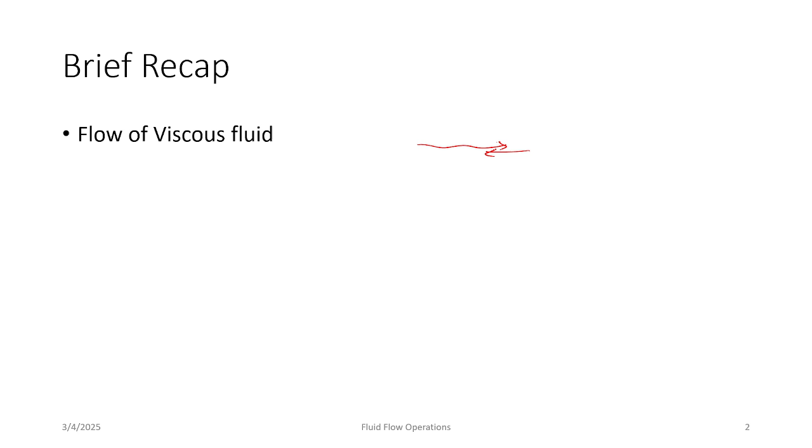When there is viscosity, it acts as an opposite force to the flow. Whenever a fluid is flowing, the viscosity will always act in the opposite direction, trying to stop the fluid. So for the fluid to flow continuously, there has to be a continuous supply of energy required to overcome this shearing resistance.

Because of this, let's say you're supplying E amount of energy, there will always be a certain amount of energy lost, let's call it small e. So let's find out what are the different losses that exist in a pipe.

Fluid frictional resistance: fluid resists objects due to friction acting on the body moving through the fluid. There will always be friction between the surface of any body or pipe and the fluid that is flowing.

Fluid friction also takes place between layers within the fluid that move relative to each other. This internal resistance to flow is also named viscosity. Apart from the viscosity between the liquid layer and the surface of the body, there is also an internal viscosity, because we have different layers of liquid, and between these layers there will be frictional force. Since this happens within the liquid itself, it is called viscosity.

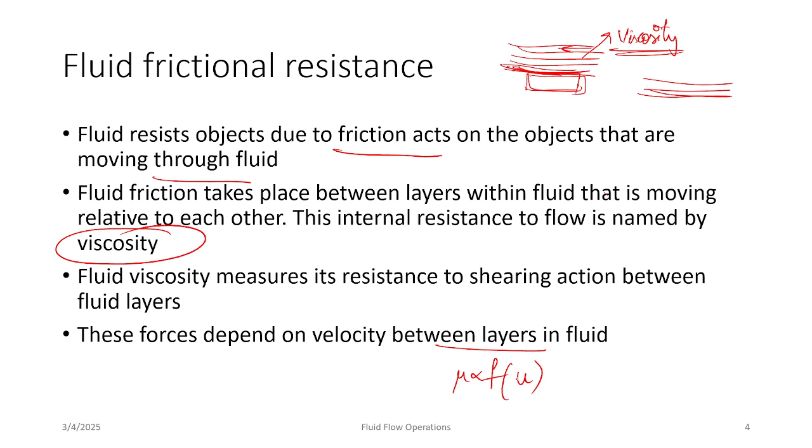This internal resistance is called viscosity. Fluid viscosity measures its resistance to the shearing action between fluid layers - how much resistance is applied between these layers. These forces depend upon the velocity between layers in the fluid; viscosity is dependent upon the velocity between the layers, du by dx, a function of change in velocity with distance.

Frictional losses: during frictional losses through the conduit, energy is lost due to frictional resistance. This is called frictional loss, and as mentioned, this is considered an external resistance. In laminar flow, losses are proportional to the fluid velocity.

Whereas in turbulent flow, losses are proportional to the square of the fluid velocity. The friction losses can be quantified by the loss of pressure or head, as we already discussed about head. This loss can be quantified in terms of loss of pressure or loss of head that occurs in a pipe or duct flow due to the effect of fluid's viscosity near the surface of the pipe.

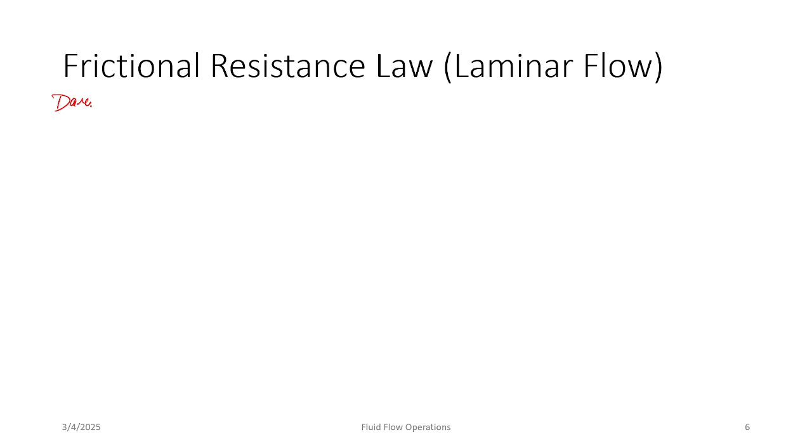Let's discuss the frictional resistance law in laminar flow. This is also called Darcy-Weisbach or Fanning friction. We'll use these equations, Darcy and Fanning equations, to calculate this frictional resistance.

Bernoulli has already given an equation which formulates the relation between changes in total energy of the fluid and energy dissipation. This energy dissipation can be expressed in terms of head loss or specific energy loss. Head loss can be expressed as HF, or it can be given in terms of specific energy loss, that is GHF, in joules per kg.

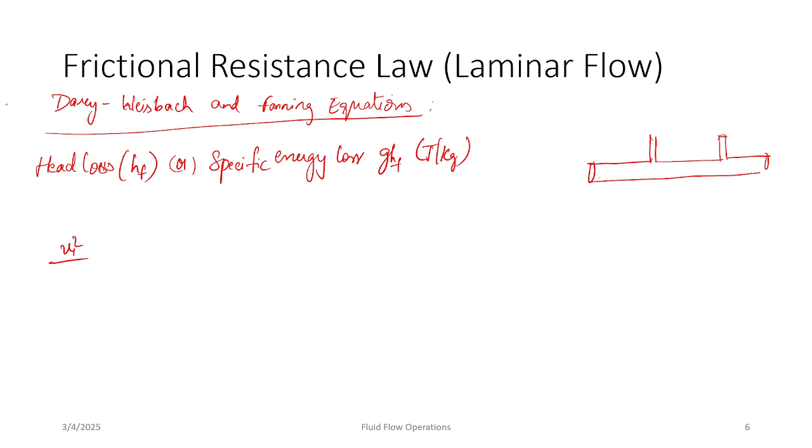According to Bernoulli's principle, we have U1 squared. Let's take a fluid flow in a pipe. Let's say here we are having this is H1 and this is H2, which is a liquid level. And U1 is equal to U is equal to U2, meaning velocities are the same at both these locations, and these are separated by a distance of L. Let me redraw it again.

This is H1 and this is H2, and they are separated by a distance of L. Velocity is the same at both these locations. Let's say the height difference between H1 and H2 is given by HF. If you apply Bernoulli's equation at both these places, we get U1 squared by 2G plus P1 by rho G plus Z1 equals U2 squared by 2G plus P2 by rho G plus Z2 plus HF. So this is H1, the total head, and this is H2, the total head at location 2.

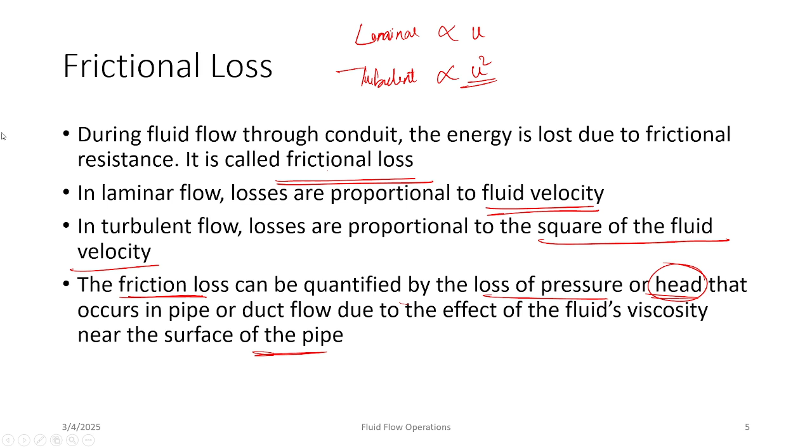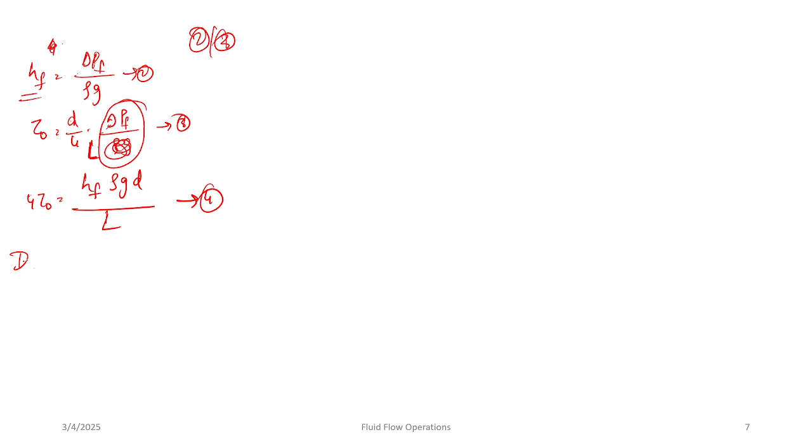Then we'll have 4 tau naught by rho u square by 2. So this is basically velocity. Rho u bar square by 2 is equal to Fd. Okay, we'll come to this later. Fd, and this is equal to hf into rho g d by L into rho u square by 2. Okay, let's say this is equation number 5.

Okay, so this hf is called Darcy, or let me write this equation again. Hf is equal to Fd into L u bar square by 2gd. Okay, so this equation is called Darcy Weisbach equation.

Okay, so we have one more form as well for this equation. This can also be written as del Pf is equal to half into Fd into rho u bar square into L by d. Just substitute Hf is equal to del P by rho g, and you will be getting this equation. So this is equation number 7. This is 6. Okay, this is also Darcy equation.

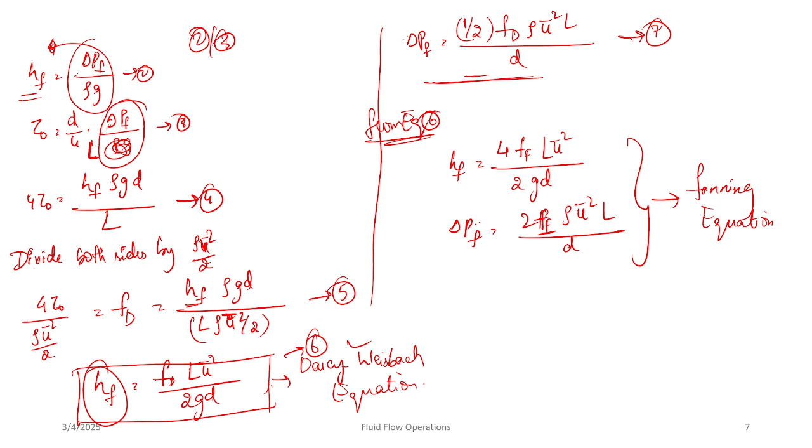Okay, so this equation number 6 can be further expressed as Hf is equal to 4 Ff into L u bar square by 2gd. And similarly del Pf will be equal to 2Ff into rho u bar square into L by d. Okay, so this is called fanning equation, and here Ff denotes fanning friction factor.

So always remember fanning friction factor will be 1/4 of the Darcy friction factor, that is Fd. So this is called Darcy friction factor, and this is fanning friction factor. So Ff will always be equal to 1 by 4 of Fd, which is a function of Reynolds number and epsilon by d.

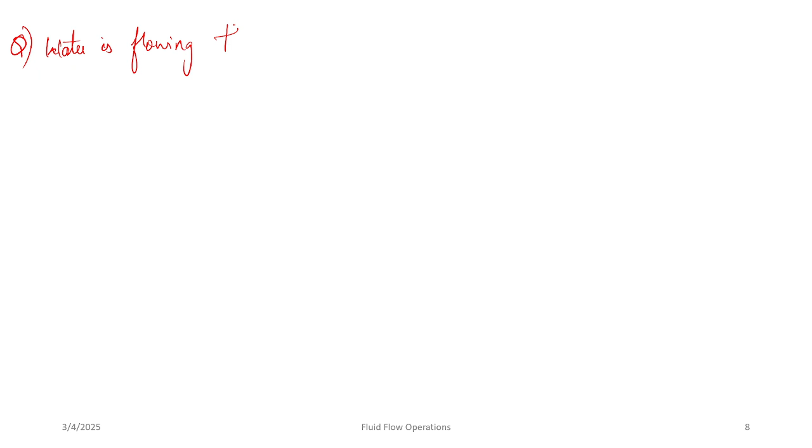Okay, so let's take an example. Let me write down the question. Water is flowing through a 10-meter long circular pipe of diameter 0.05 meters at an average velocity of 2.5 meter per second. So determine the head loss, frictional pressure drop, and shear stress.

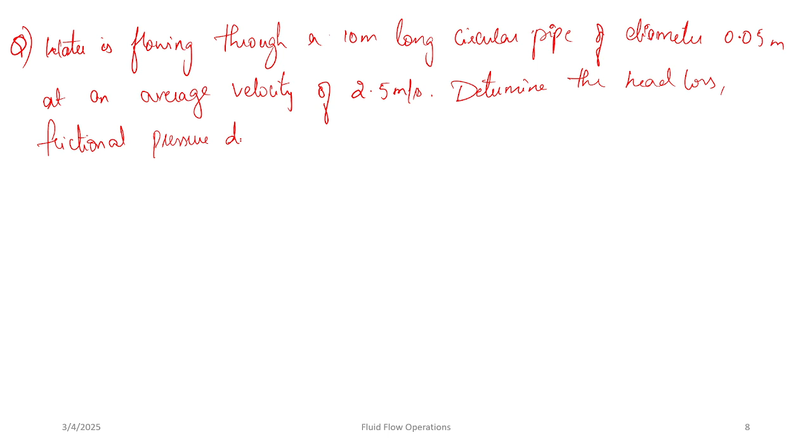So we are already given that Darcy friction factor is 0.115. So how do you calculate this? We are supposed to calculate the head loss. So head loss is given by HF, which is equal to FD into L U bar square by 2GD. Okay, so we are already given all the values.

We were given average velocity, that is 2.5. U is given, and the length L is also given. So L is equal to 10 meters, U is equal to 2.5 meter per second, and diameter is also given, that is 0.05 meters. So FD is also given, that is 0.115. So FD is given, L is given, U is given, 2 is constant, D is given, and G can be taken as 9.8 meter per square second, or you can also take 10 if that suits the calculation, depending upon your calculation simplicity.

So if you solve this correctly, you should be getting around 7.36 meters. And we are also asked to calculate frictional pressure drop, right? So how do you calculate it? Just substitute the value for HF.

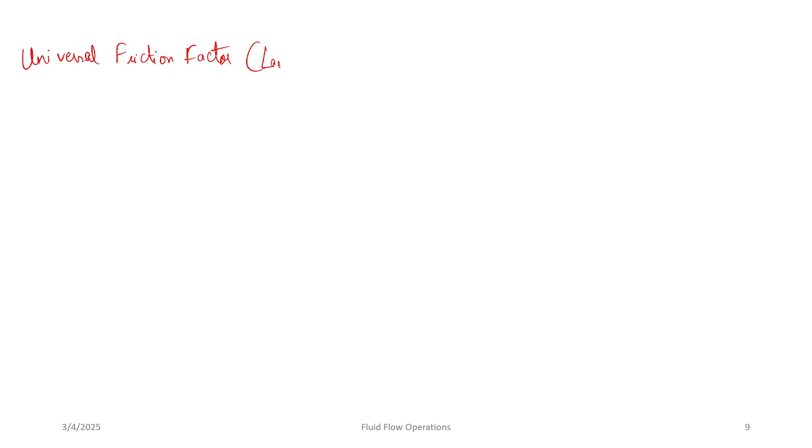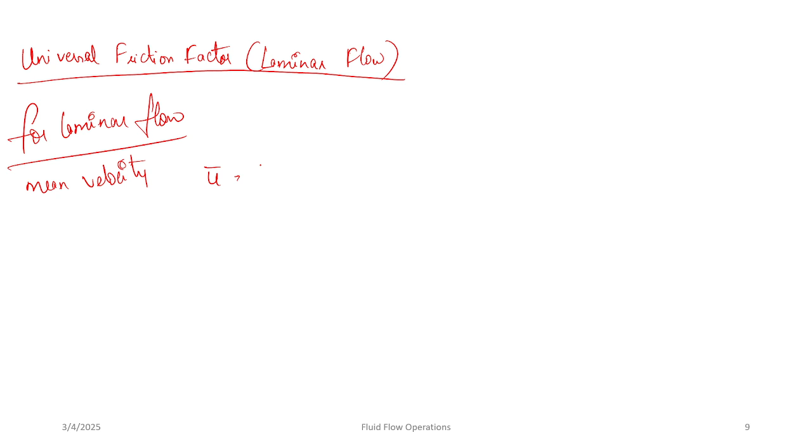So we know for laminar flow, mean velocity can be calculated as discussed long back. Mean velocity can be written as R naught square by 8 mu into dp by dx. This can also be written as d square by 32 mu into del p by L. Let's say this is equation 11.

So from equations, let's say this is 7, this is 8, and this is 9, and this becomes equation number 10. So from equation 9 and 11, we can write Fanning friction factor FF as 16 by rho u bar d by mu.

This will become 16 by RE. So we have F. We can also write it in terms of FD. FD will be equal to 4 times FF, so it will be 64 by rho u bar d by mu, which will be equal to 64 by RE.

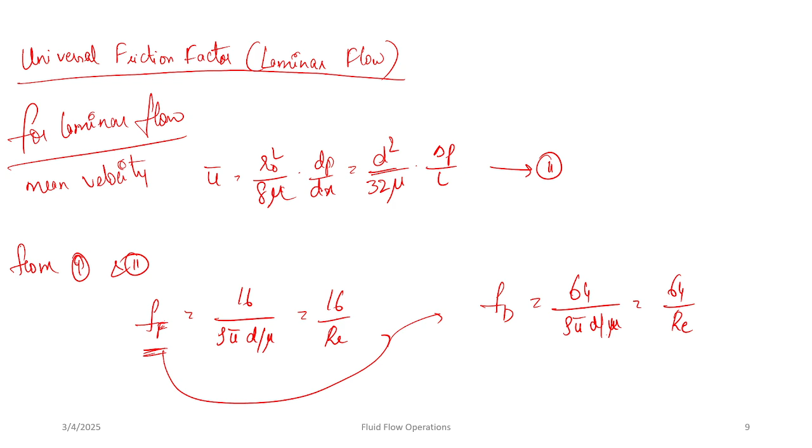And for turbulent flow, as per equation number 5, FD will be equal to 4 tau naught by rho u bar square by 2. Let's say this is equation number 14.

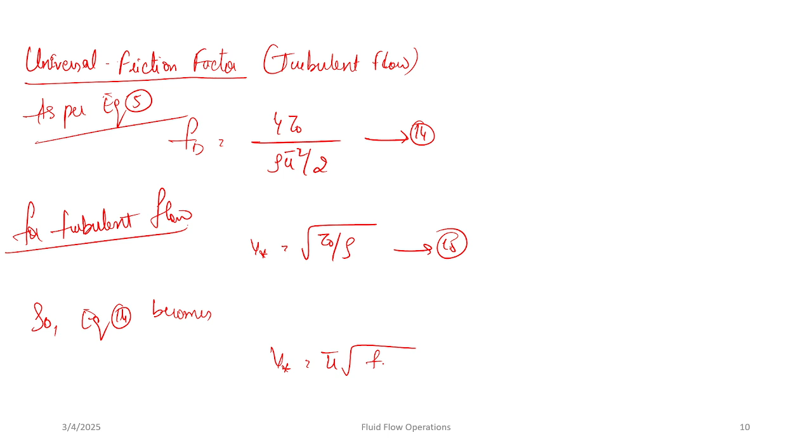And for turbulent flow, V star will be square root of tau naught by rho. Let's say this is equation 15. So equation 14 can be written as V star is equal to u bar into square root of FD by 8. Let's say this is equation 16.

This is equation number 16. So let's see the case for turbulent flow through smooth pipe.

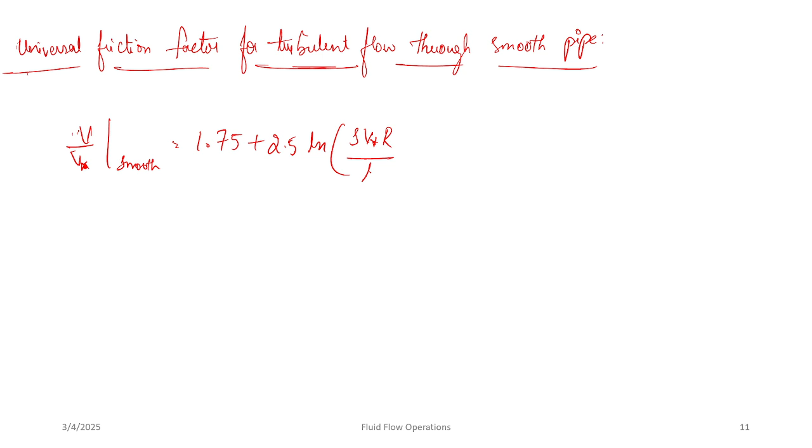For turbulent flow through smooth round pipe, the average velocity can be given by, since it's turbulent flow, we'll be dealing with V star. V by V star smooth will be equal to 1.75 plus 2.5 into ln of rho V star R by mu. This also we discussed last time. Let's say this is equation number 17.

So if you substitute shear velocity V star from equation 16 into equation 17, we get 1 by square root of FD by 8 is equal to 1.75 plus 2.5 into ln of rho u bar by mu into square root of FD by 8 into d by 2. Let's say this is equation 18.

And if we further simplify this, we get 1 by square root of fd is equal to minus 0.913 plus 0.884 into ln of re root fd.

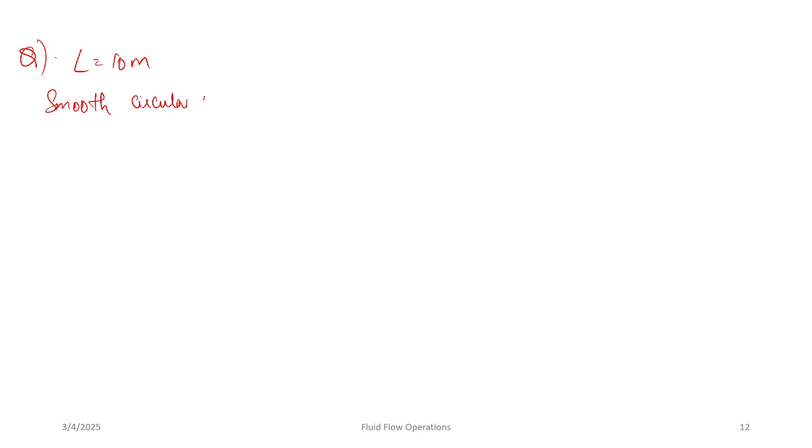Water is flowing through a 10-meter long circular smooth pipe. So L is equal to 10 meters, smooth circular pipe. Diameter is given as 0.05 meter. And the fluid inside this circular pipe is flowing at an average velocity of 3.076 meter per second.

So this is a circular pipe. Its length L is equal to 10 meters. Diameter is equal to 0.05 meters. And velocity or mean velocity or average velocity is given as 3.076 meter per second. We are asked to calculate shear velocity V star and Darcy friction factor FD.

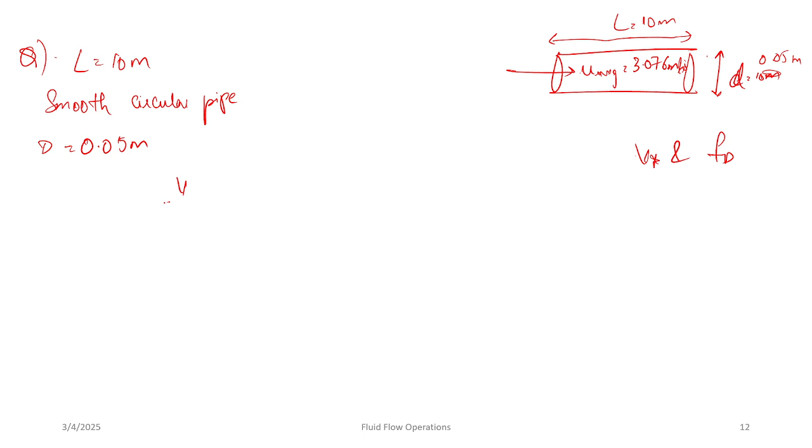So let's use the same equations. V by V star is equal to 1.75 for turbulent flow within a smooth circular pipe. So let's use the same equation: V by V star smooth will be equal to 1.75 plus 2.5 into ln of rho V star R by mu.

V is given, and this is also dependent as V. V is given as 3.076 by V star, which is equal to 1.75 plus 2.5 into ln. Here water is flowing, so rho will be equal to 1000 kg per meter cube, and viscosity will be 0.001 for water. Let's substitute them.

It will be 1000 into V star into radius, that is half of diameter, so it will be 0.025 by 0.001.

So if you simplify this, V star will be around 0.139 meter per second. And we are also asked to calculate Darcy friction factor, right? So how do you calculate it?

Using this equation, we'll get 1 by square root of FD is equal to minus 0.913 plus 0.884 ln of RE square root, RE into square root of FD. So here we have to use trial and error method, because we have to check which would be the correct answer.

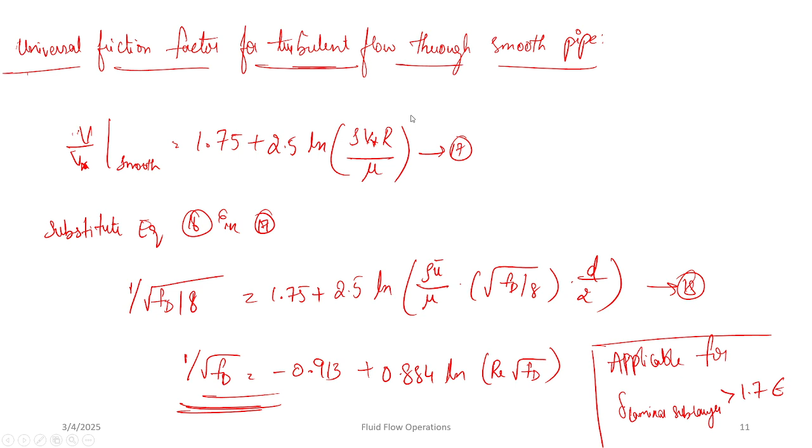If this is clear, we'll move on to the next one. So now we discussed about friction factor in turbulent flow for a smooth pipe, right? So let's see the case for rough pipe.

So firstly, if you are changing the surface of the pipe, that is, if you're changing from a smooth pipe to rough pipe, the relation of the equation for shear velocity will also be changing, right? So let's first write it down.

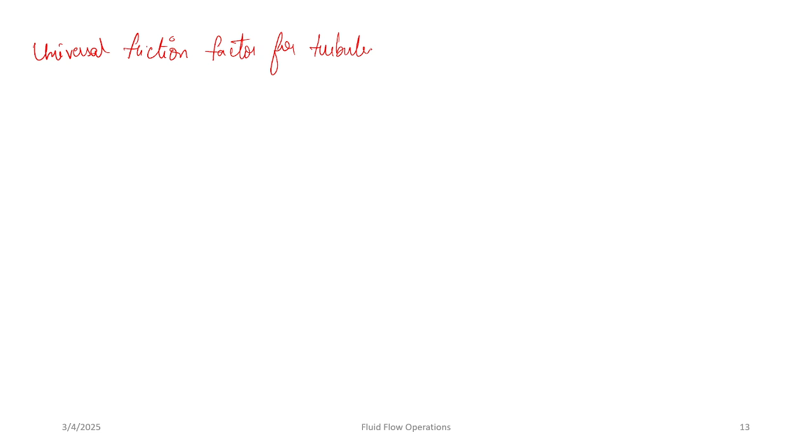Through rough pipe. So for turbulent flow through a rough round pipe, the average velocity will be given by V by V star rough, which will be equal to 4.75 plus 2.5 into ln of R by epsilon. So this is equation 19.

Now substitute V star from equation 16. If you substitute and simplify the equation, you'll be getting 1 by square root of fd by 8 will be equal to 4.75 plus 2.5 into ln R by epsilon. Or let's say you can also write 1 by square root of fd will be equal to 1.066 plus 0.884 ln d by epsilon. So let's say this is equation number 20.

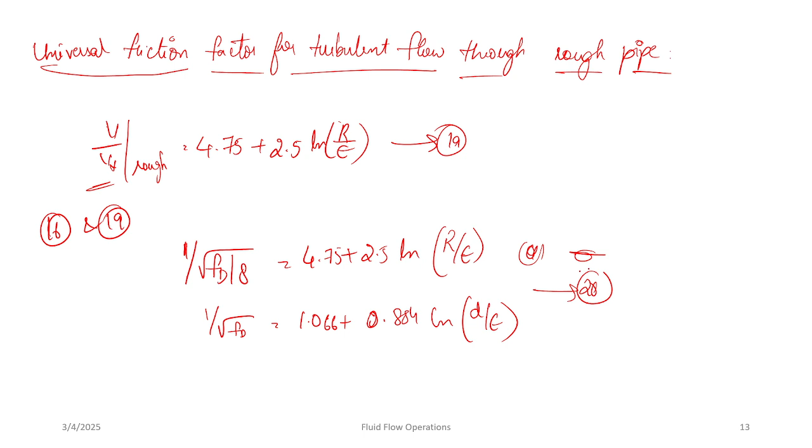And this is applicable for delta less than 0.08 epsilon.

So let's also solve the same problem that we just discussed. Let's say all the conditions remain the same, but instead of a smooth pipe, we are having a rough pipe in this condition. So water is flowing with average velocity 3.076 meter per second through a rough pipe. Length is 10 meters, diameter is 0.05 meters. Now calculate shear velocity and Darcy friction factor.

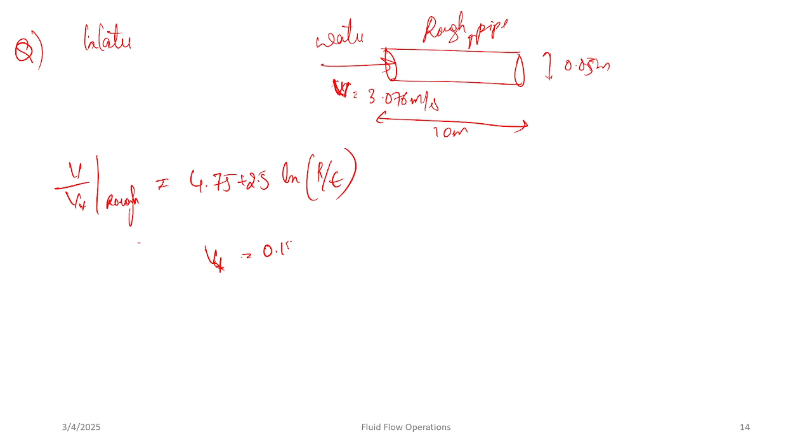So we have V by V star rough is equal to 4.75 plus 2.5 into ln R by epsilon. Using trial and error method, V star will be 0.136 and epsilon will be 0.02 mm. We have to do the trial method because we have two variables here.

Using these values, if you solve for FD, it will be 1.066 plus 0.884 into ln d by epsilon. So if you substitute values, FD will be equal to 0.01561.

So this roughness factor, like we are saying smooth pipe and rough pipe, right? This is a relative term and it depends a lot on the material of the pipe. So let's see the values of this roughness for different pipes.

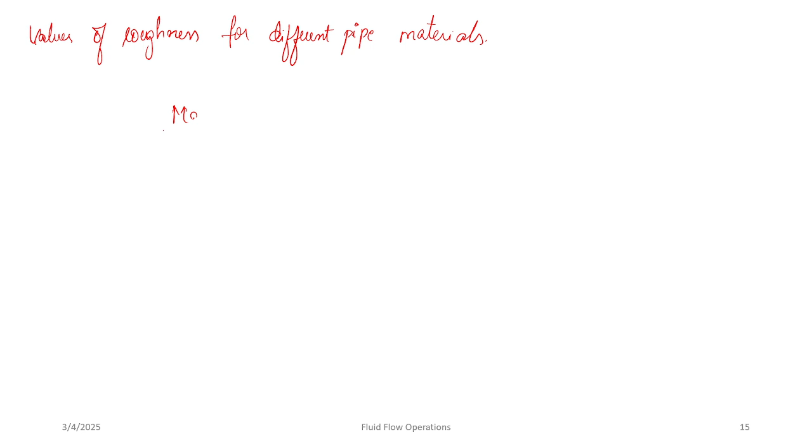So for asphalt cast iron, these are experimentally determined values. So for asphalt cast iron is 1.2 or 1.12 or 0.120, and for cast iron this is 0.265.

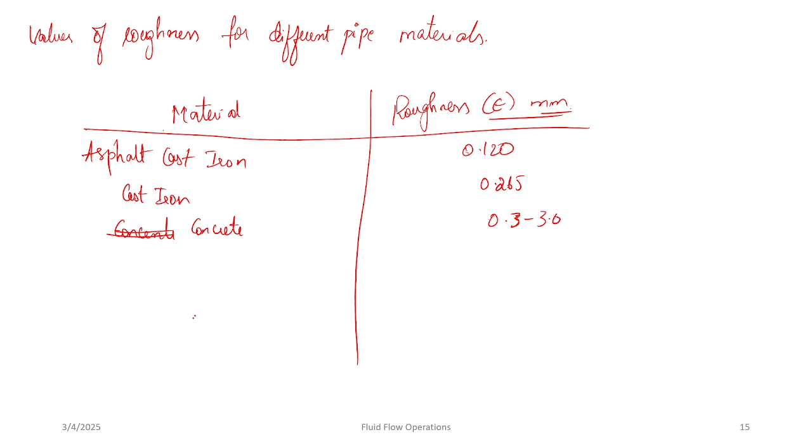For concrete pipes, this is 0.3, and it also varies till 3, so 0.3 to 3. And for galvanized iron, 0.15. For PVC, glass, and other drawn tubing, this value is 0.0015. So it depends on the material of construction.

So let's say you are using a pipeline. Let's take any material, be it cast iron, asphalt cast iron, or concrete pipe, whatever it may be. So you have started using a pipeline.

As you use it for a very long time, what happens? The roughness will not remain the same, right? It will be varying, it will be changing. So when you use it for a long period of time, the roughness of the pipe will be changing. So how do you determine this change in roughness? You have to know the value of the initial roughness, or roughness of the new pipe, then you'll be able to calculate the roughness of the old pipe. So let's see how to do this.

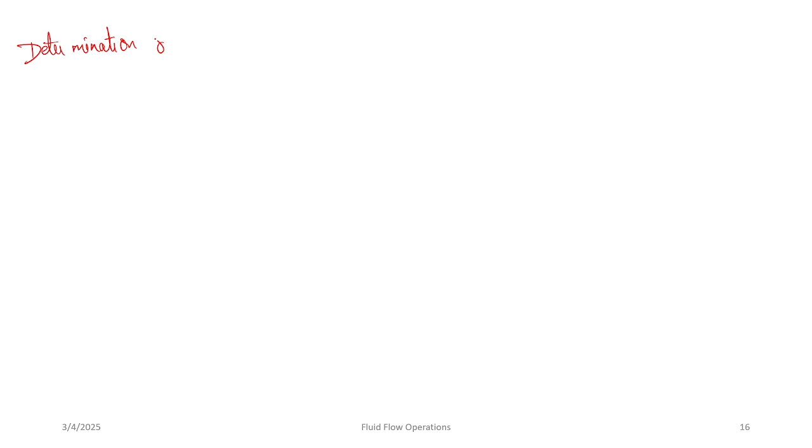Determination of roughness of old pipe. According to Colebrook and White, the roughness height of old pipe can be determined by knowing the roughness height of new pipe based on the age of the pipe. They formulated that E old, the roughness height for an old pipe, will be equal to roughness of new pipe plus alpha T.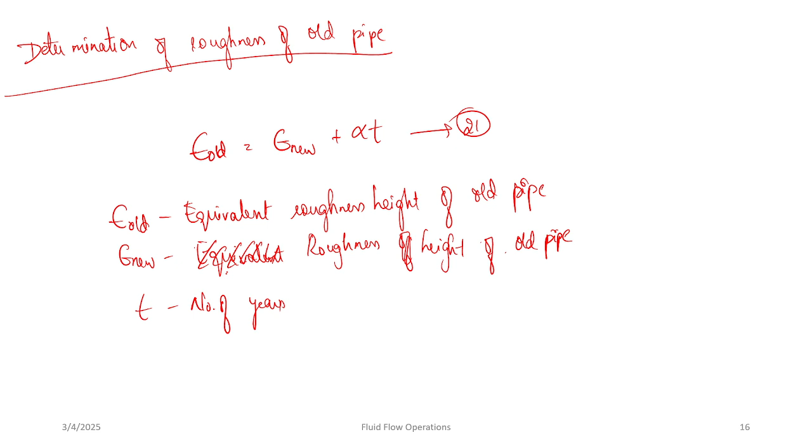Where E old is equivalent roughness height of old pipe, and epsilon new is equivalent roughness height of new pipe, and T is the number of years of usage, and alpha is constant.

This alpha can be determined experimentally, which varies depending upon the pipe, varies with pipe material. So let's take an example.

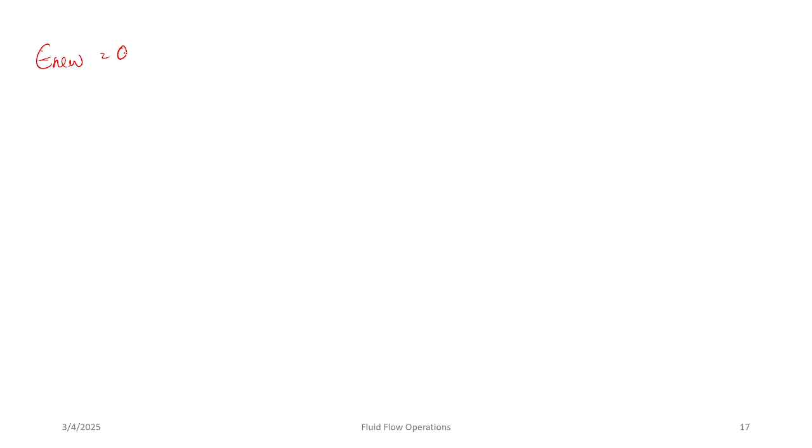It is observed that high viscous corrosive liquid is flowing through a pipe of roughness 0.08 mm. So E new is given as 0.08 mm, and the pipe was kept unused for almost 5 years. So T is 5, and it was found that when it was used, the roughness of the pipe was 0.01 mm, that is E old will be 0.01 mm. So what should be the roughness of same pipe when it is used after 5 years? We are asked to calculate E old after 5 years.

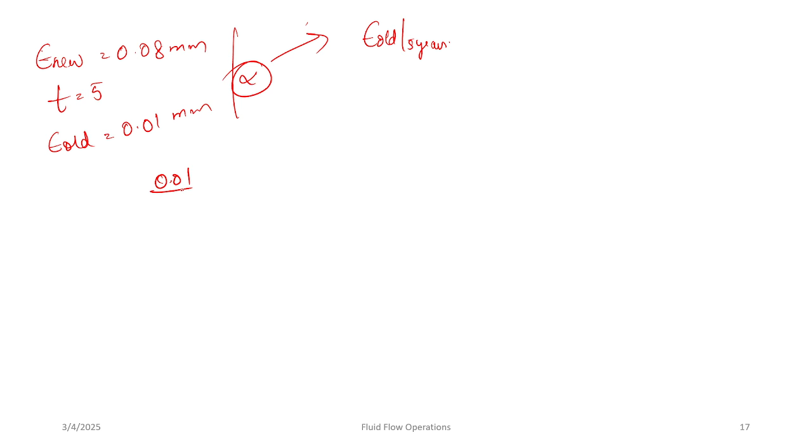So how do you do it? First, we have to calculate alpha from this data. Then we'll be able to calculate E old after 5 years. So this will be 0.01 by 1000, this is in mm, right, will be equal to 0.08 by 1000 plus alpha into 5 years, right, 5 into 365 days into 24 into 3600.

So alpha will be minus 4.439 into 10 power minus 13. So now we can calculate E old.

That will be E new minus alpha T. So this will be 0.08 by 1000 minus of minus 4.439 into 10 power minus 13 into 5 into 365 into 24 into 3600. If you solve this, we'll be getting 0.00015 meters, that is equivalent to 0.15 mm.

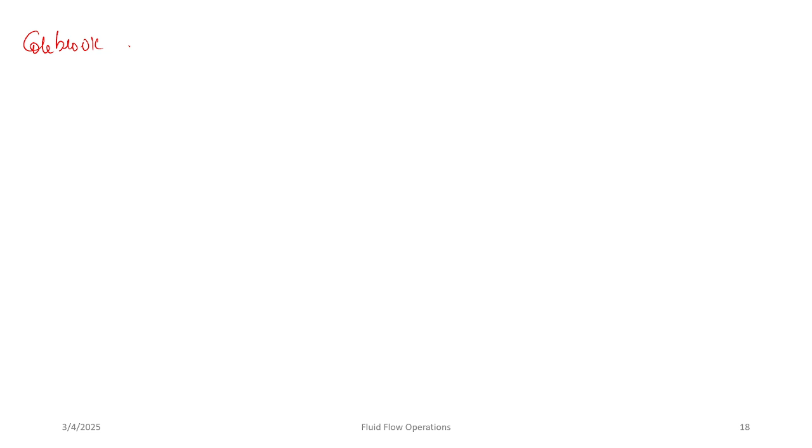So we have an empirical formula given by Colebrook for calculating friction factor - Colebrook empirical equation for friction factor. For different conditions, he recommended certain empirical equations.

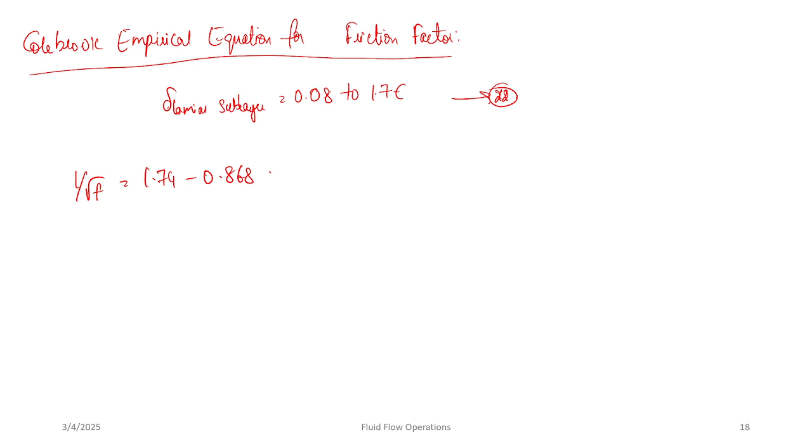Let's find out this equation. For laminar sublayer thickness of 0.08 to 1.7 E, 1 by square root of F will be equal to 1.74 minus 0.868 ln epsilon by R plus 18.7 by RE into square root of F. This is equation number 23.

This can also be written as 1 by square root of F is equal to minus 0.868 ln epsilon by 3.7 D plus 2.51 by RE into square root of F. This is equation number 24. He's also mentioned different conditions, this is for laminar sublayer thickness of 0.08 to 1.7 epsilon.

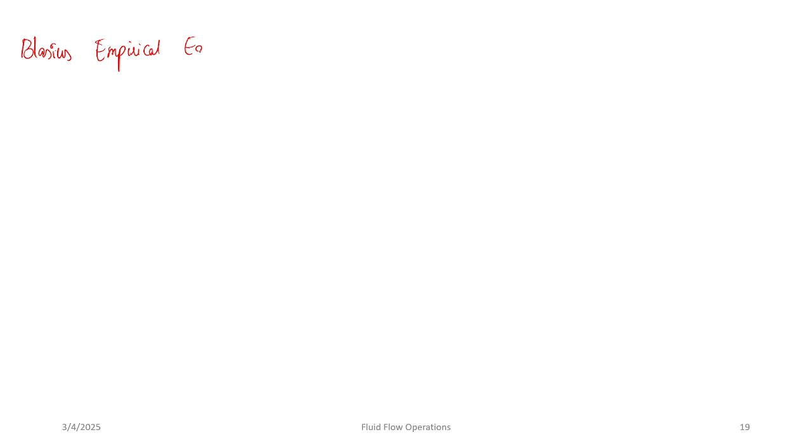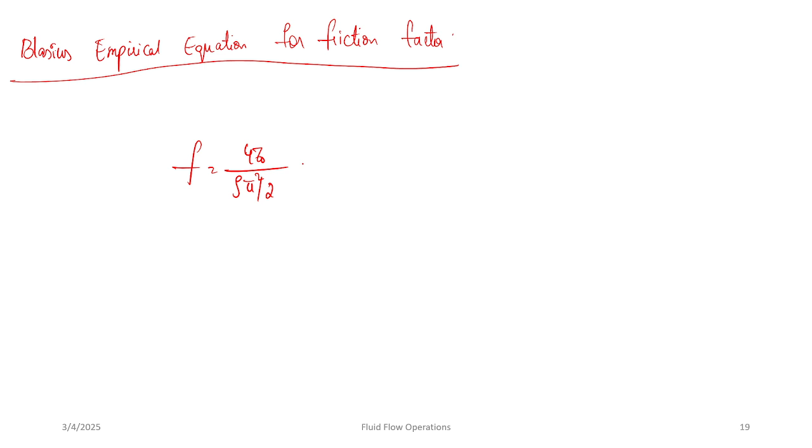So then we have Blasius empirical equation. In 1913, Blasius developed an empirical correlation based on experimental work to calculate the friction factor in turbulent flow through a smooth round pipe. Based on his observations, he formulated an empirical correlation that looks something like this: F is equal to 4 tau naught by rho u square by 2, which is equal to 0.3164 by RE power 1 by 4. This is equation number 25. And the condition for Reynolds number is it should be in turbulent flow.

10 power 5. This is for turbulent flow through a smooth round pipe.

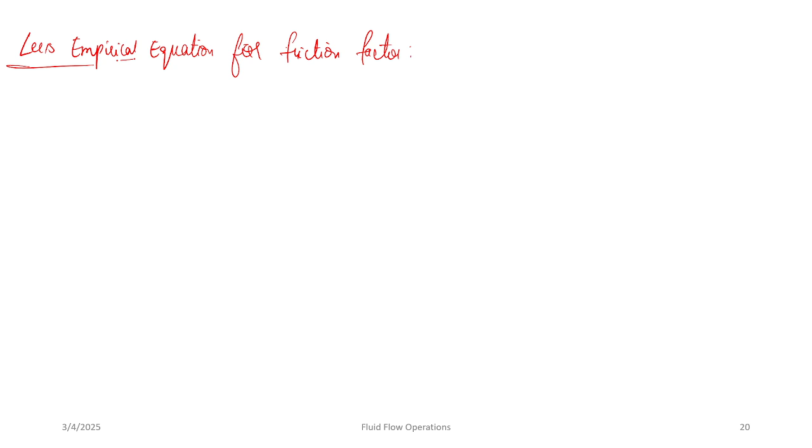And then we have Lee's empirical friction factor, Lee's empirical equation for friction factor. Different scientists propose empirical relations based on their observations, by changing different set of equations or different set of parameters. They have come up with different empirical equations. So in 1924, Lee has also developed a correlation for friction factor in turbulent flow for a smooth round pipe, and this was based on his experimental work. Empirical equations always will have a certain error in them, right, so that is why many scientists were able to come up with different equations.

So F will be equal to 4 tau naught by rho u bar square by 2. This will be equal to 0.0072 plus 0.611 by RE power 0.35. This is based on his observations. And here RE varies between 4000 to 4 into 10 power 5. So this is again for turbulent flow in smooth round pipe.

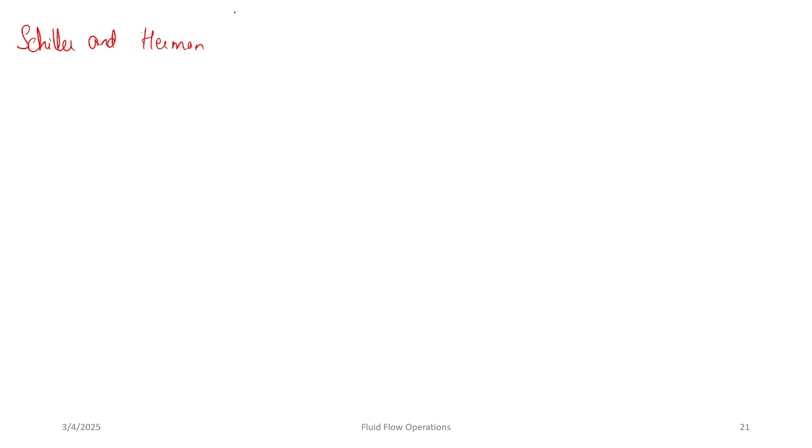Then we have Schiller and Hermann empirical equation for friction factor.

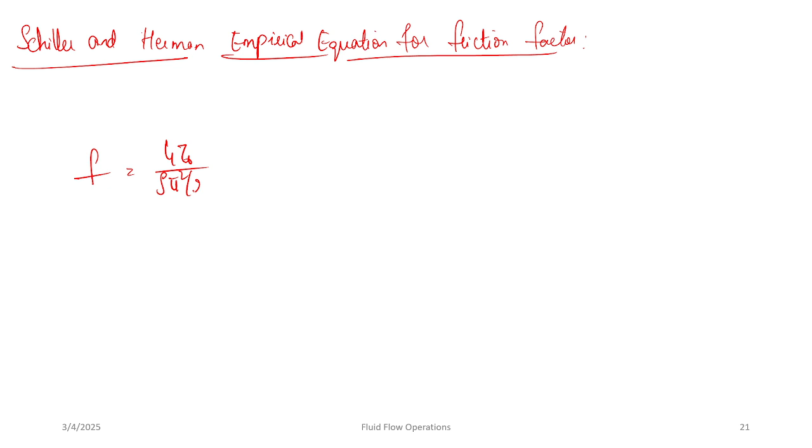In 1930, scientists Schiller and Hermann suggested a new empirical correlation based on their experimental work, to estimate friction factor in a turbulent flow through smooth round pipe. According to their observation, F equals 0.0054 plus 0.396 by RE power 0.3.

This is equation number 27, again for turbulent flow in smooth round pipe. They did this experiment using conditions where RE should be between 2300 to 4 into 10 power 5, that is in the turbulent region.

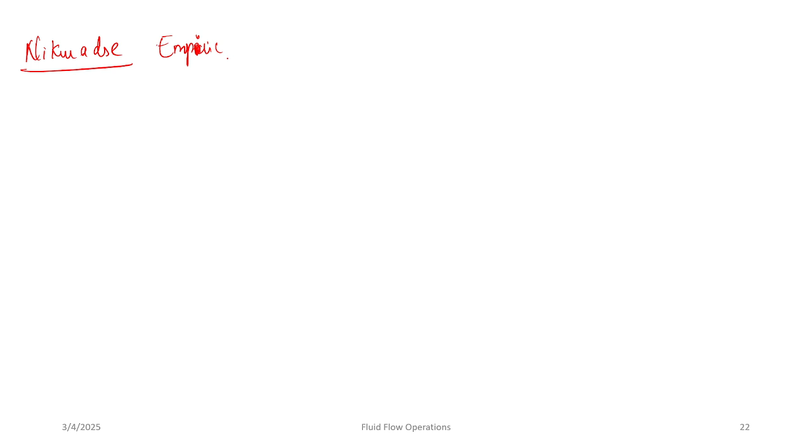And we have one more scientist who proposed an empirical equation for friction factor. In 1932, he developed an empirical correlation based on his work, for the same condition, that is turbulent flow through smooth round pipe. According to his observations, F equals 4 tau naught by rho u bar square by 2.

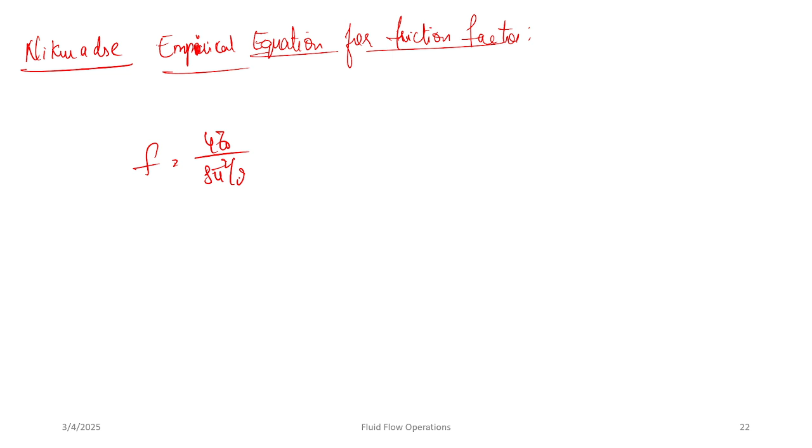According to his observation, that is 0.0032 plus 0.221 by RE power 0.237. This is equation number 28, again for turbulent flow in smooth round pipe. The conditions for Reynolds number are as follows: 10 power 5 less than RE less than 10 power 8.

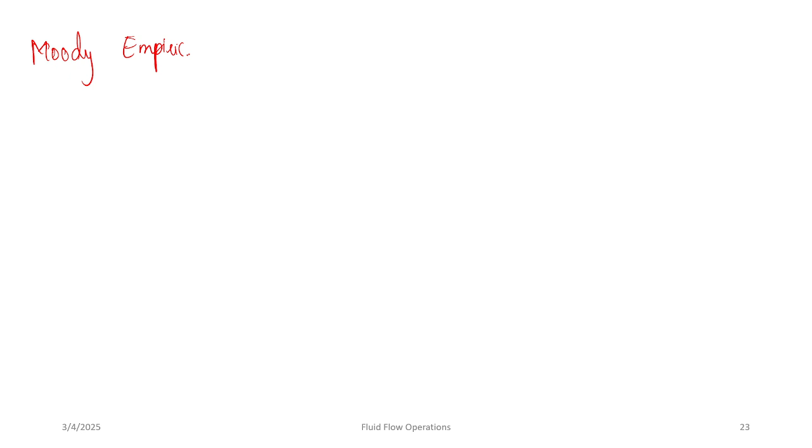And then we have one more scientist, that is Moody. In 1944, Moody, based on his experimental work, developed an empirical relation, but this time for a rough pipe. According to his observations, F is equal to 4 tau naught by rho u bar square by 2. This is equal to 0.0055 into 1 plus 20,000 into 2 epsilon by d plus 10 power 6 by Re power 1 by 3. This is equation number 29.

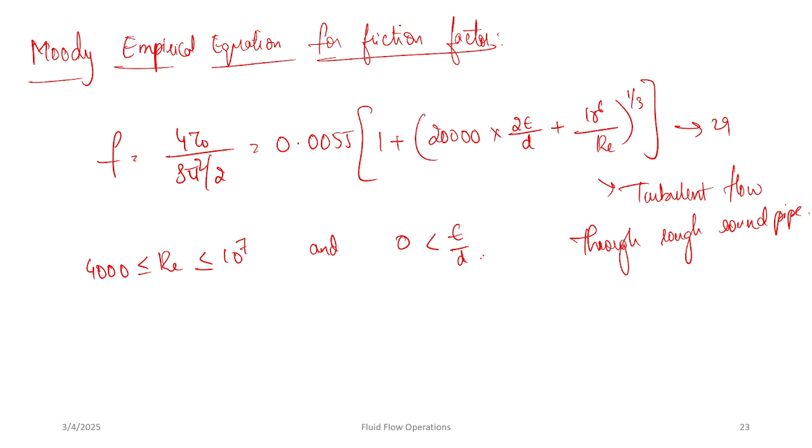And this is for turbulent flow through rough round pipe. The conditions for Re are 4000 less than Re less than or equal to 10 power 7, and they also did the experiment for epsilon by d, which is between 0 to 0.01.

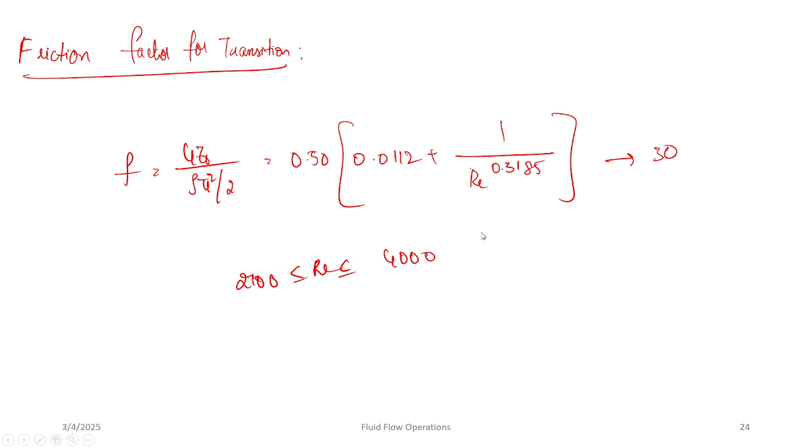So what are the factors? We were going through different empirical formulas proposed by different scientists based on their observations. But what are the factors which might be affecting? If you want to develop an equation in future, what would be the factors that we'll be considering that will be affecting this head loss?

Factors that affect head loss. So what are the factors that would be affecting? What is the formula for HF? HF is FD into L U square by D H into 2G.

So it is clear that flow rate is one parameter which affects. Flow rate, and diameter is also a quantity, or you can say inner diameter to be specific, inner diameter of pipe.

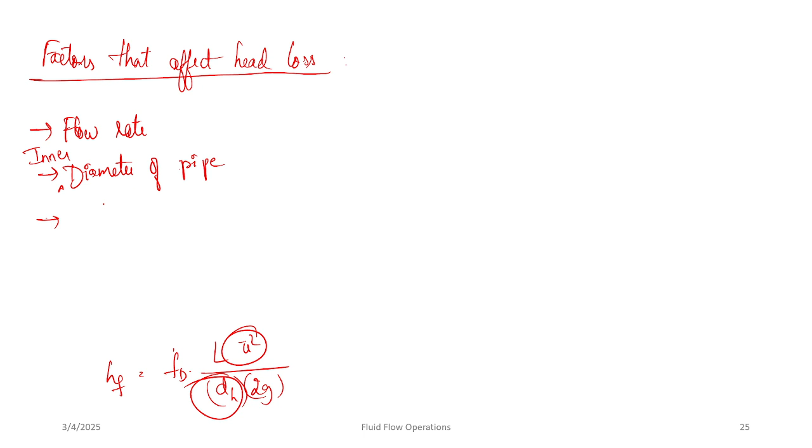And roughness will also be affecting. If the surface is more rough, it will be having more effect on the head loss rate. So roughness, and length also affects. Length of the pipe. What else?

Viscosity of the fluid will also be affecting, viscosity of the fluid or liquid. Then what will be the other parameters?

Flow rate, inner diameter, roughness of the pipe, length of the pipe, viscosity. What else will be affecting? Corrosion will also be affecting it. Corrosion and scale deposition, so corrosion and scale deposits.

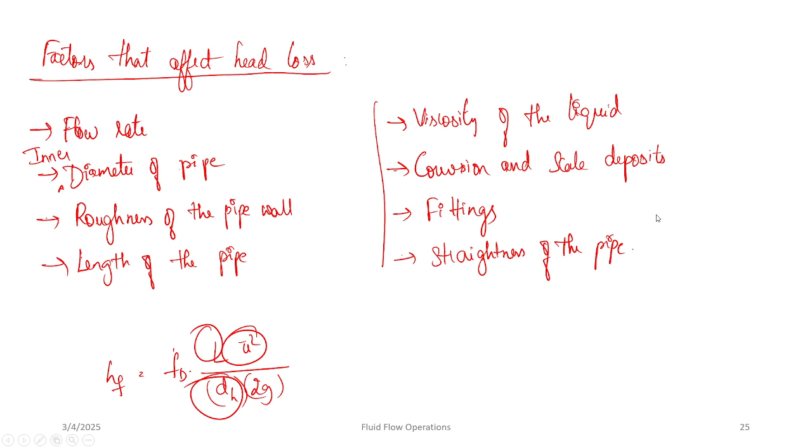And fittings will also be affecting. If there are more fittings, there will be more loss, right? And also straightness of the pipe. So these are the different parameters which will be affecting or influencing the head loss.

So these head losses can be classified into two types, that is major head losses and minor head losses. Let's check them. Major losses are due to the fluid friction in a normal geometric pipe, whereas minor losses are due to the fluid friction in geometric change of pipes. So whenever there is a change in the geometry, those losses are considered as minor losses, and the normal friction losses in a normal geometry pipe are considered as major losses.

So HF major can be written as FD into L by DH into U square by 2G, where FD is Darcy friction factor.

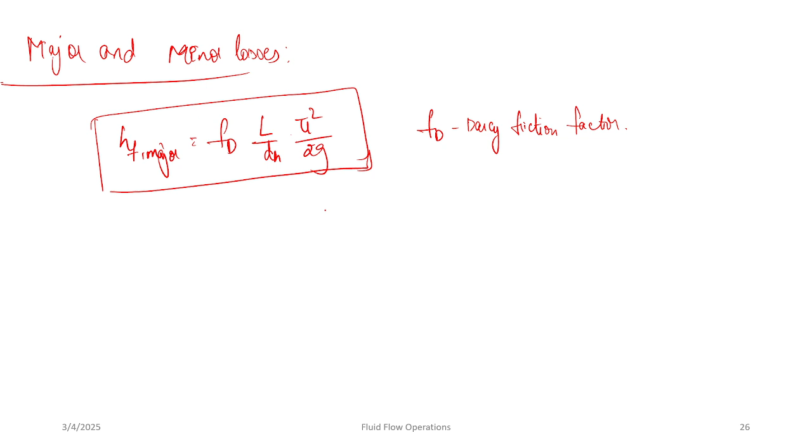Okay, and we have minor losses, that is given by HF minor is equal to K into U square by 2G, where K is minor loss coefficient.

So is there any way that we can find out an equivalent length so that minor losses will become equal to major losses? For that you just have to equate both the equations. Or we can do one better. So FD into LE, that is equivalent length, by DH is equal to K. So LE will be equal to DH by FD into K. This gives the relation between length of the pipe for which both minor loss and major loss will be equal.

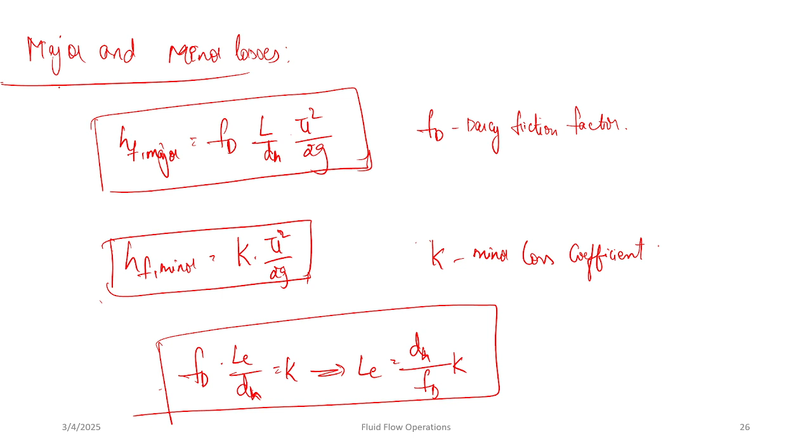So whenever the geometry of the pipe changes, the losses will be increasing, right? So let's say instead of a circular pipe, we are having a rectangular conduit or rectangular pipe, and then we have something which is having an oval shape. So how do you calculate losses in such pipes?

So you have to consider something called hydraulic diameter. Everything remains the same, but when you are taking diameter of the pipe, instead of taking diameter directly, you have to take hydraulic diameter. So how do you calculate hydraulic diameter? Hydraulic diameter, DH, is given as 4 into cross sectional area by wall perimeter in contact with fluid.

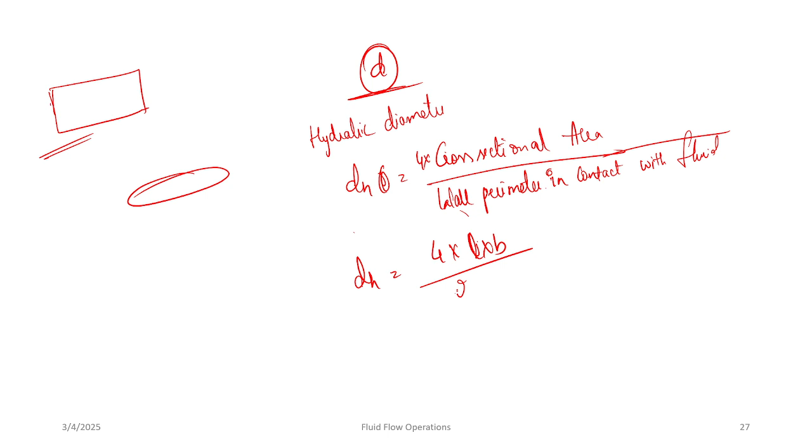So let's take the case of a square or rectangular pipe. What would be the area? Length into breadth, right? And what will be the wall perimeter in contact with the fluid, or you can also say wetted wall perimeter? You just have to find out the perimeter where the fluid is touching the surface of the wall. Here it will be equal to the normal perimeter because it will be touching all four walls, so it will be 2 into L plus B. So DH will be equal to 2LB by L plus B.

And if you take a square cross-sectional pipe, DH will be 4 into area, A square, by the contact or wetted wall perimeter, that will be 4 into A. So DH will be equal to A for a square pipe. So this is how you'll be able to calculate loss in a pipe - you have to consider hydraulic diameter.

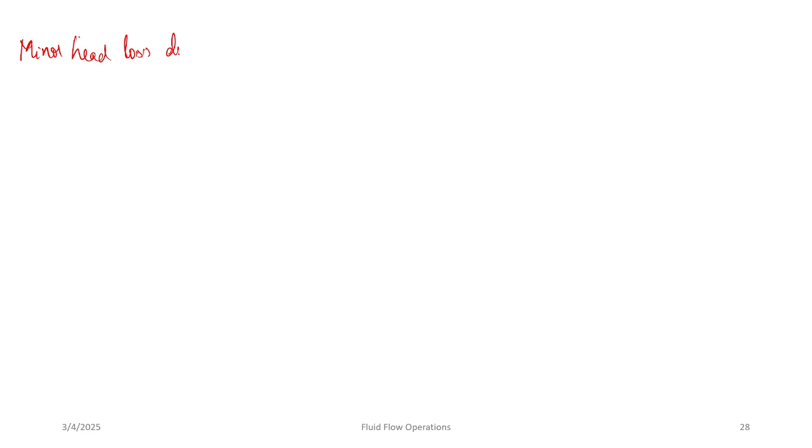So then we have minor head loss due to additional turbulence. In a pipeline, head loss is also produced because of additional turbulence, which arises because of components which cause a change of area, and because of junctions, bends, change in direction of flow, branching. These parameters will also be causing additional losses due to change of area, which could be either sudden or gradual.

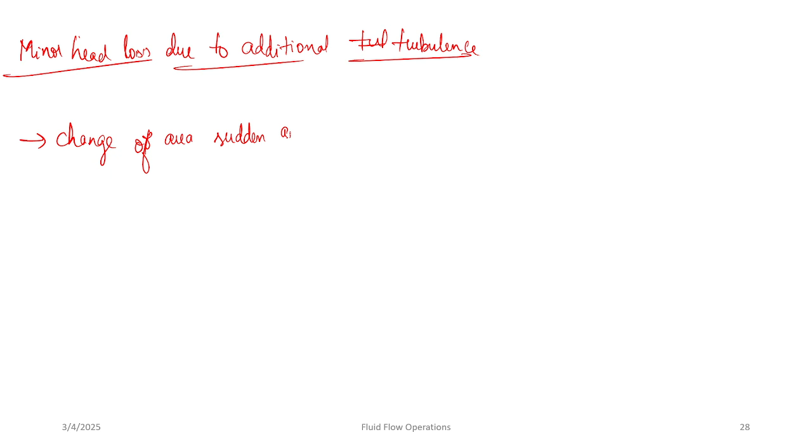And because of junctions, change of direction of fluid motion, because of bends, branching, valves - there are many other reasons which will be causing additional losses. So the generalized equation for accounting all such head losses can be given by H, that is additional head loss, equals K into U square by 2G, where K is a coefficient which depends upon the geometry and direction of flow. This is a loss factor.

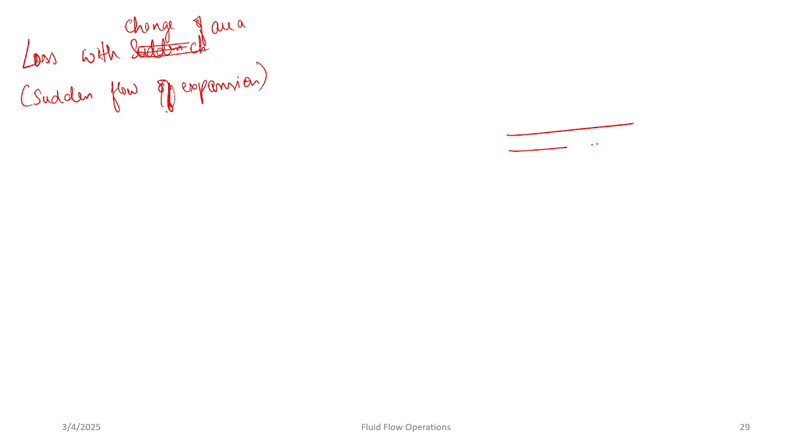So let's consider cases with sudden expansion - loss of head due to sudden flow expansion. Let's say a pipeline is connected to a tank, or you're filling a reservoir using a pipeline. Initially the area was A1, and now this is flowing, having a sudden expansion. So it is already filled, and this is suddenly having more area.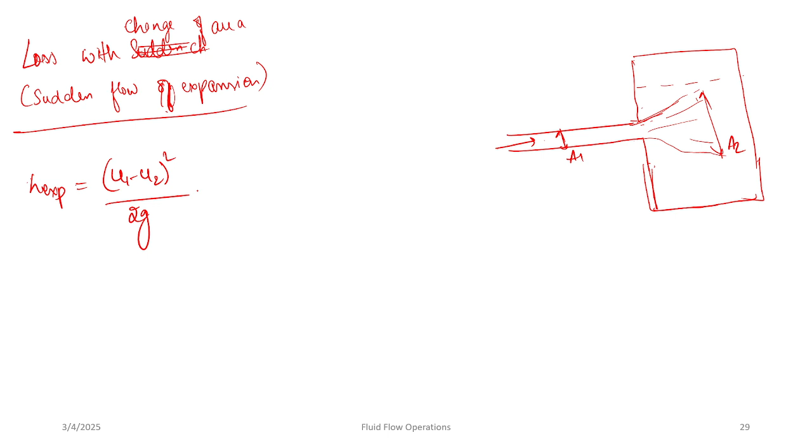So this sudden change in area will also cause head loss, and this is given by: head loss due to sudden expansion equals change in velocity, u1 minus u2, whole square, by 2g. This can also be written as 1 minus a1 by a2 whole square into u1 square by 2g.

Or simply you can write h expansion is equal to ke into u1 square by 2g, where ke is 1 minus a1 by a2 whole square.

If in this case the expanded cross-section area tends to infinity, that means if the water is flowing into a large reservoir, where the area is very large compared to the small pipe, then K tends to unity, and the loss in that case is called exit loss. This is applicable only when the reservoir is of very large area compared to the pipe area.

We have one more case, that is loss with change of area. This is sudden flow contraction.

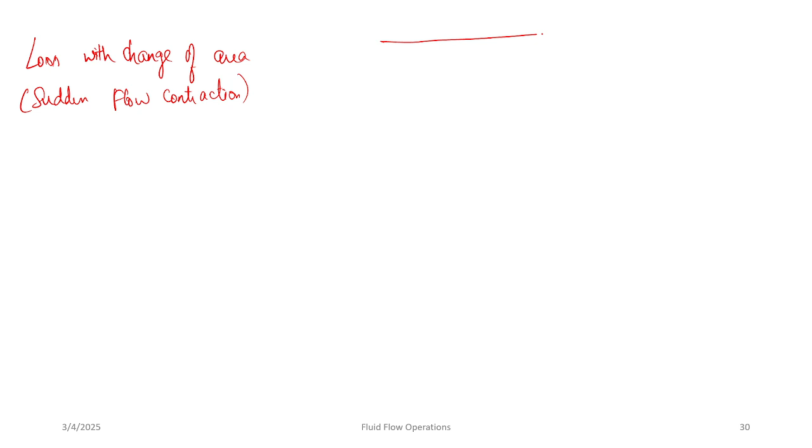So we have a larger pipe, and then we have a smaller pipe. Initially it was having a velocity of u1, and the cross section area is a1, and now suddenly it is flowing in a smaller channel. There will be sudden contraction as well, and the velocity will be increased. So it won't directly take this shape.

First it has to overcome this obstruction, then it will be flowing something like this. So there will be this contraction, here it will be having UC, and then finally it will be having U2, that is velocity in the normal channel. This sudden contraction will cause loss in the velocity, or loss in the head.

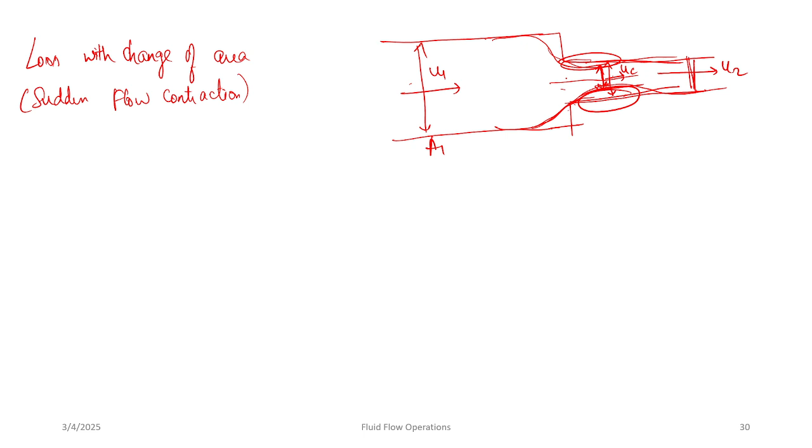This can be calculated as H contraction equals UC minus U2, by 2G, whole square. Instead of changing from U1 to U2 directly, it will first change from U1 to UC, and then change to U2, because of the separation zone, or because of the sudden contraction. This will be equal to A2 by A1 minus 1 whole square into U2 square by 2G.

This can also be written as 1 by KC minus 1 whole square into U2 square by 2G. Here KC can be written as AC by A2. KC is called the contraction coefficient, and AC is generally 61% of A2, that is the final area.

There are two terms here. Whenever the fluid is flowing, the fluid is getting contracted. So it will first contract into a zone, and then it will occupy the entire pipeline. Let's say this separation zone length is IC, and the diameter is DC. This is a case valid only for IC less than DC.

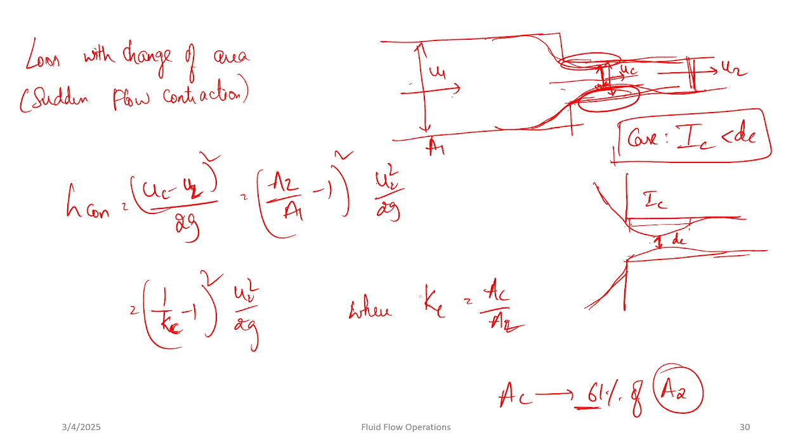We have other cases as well. What if IC is greater than DC? So everything remains the same, but this is called the case where the length of the narrow section is long compared to the diameter.

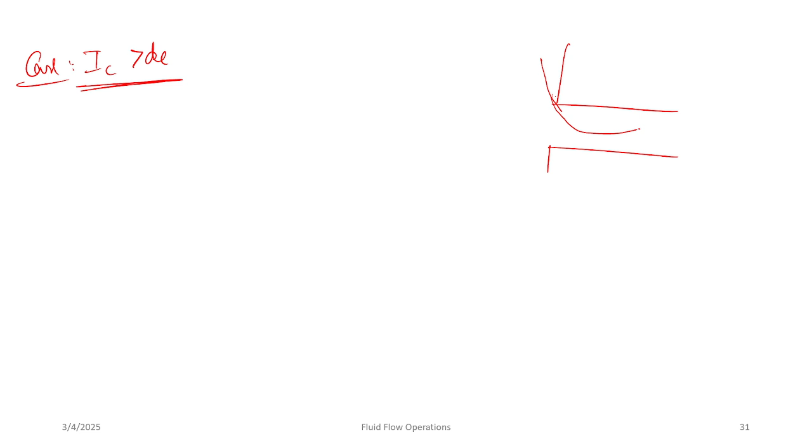So this is the length, that is IC, and this is DC. Here IC is greater than DC, meaning the length of this narrow channel is long compared with the diameter of the channel. This device is called a choke, because it is choking the fluid.

So head loss can be calculated as H choke equals K choke into UC square by 2G, which is Kc into A2 by AC whole square into UC square by 2G. This can also be written as, K choke equals Kc square into 1 by Kc minus 1 whole square, where Kc is AC by A2.

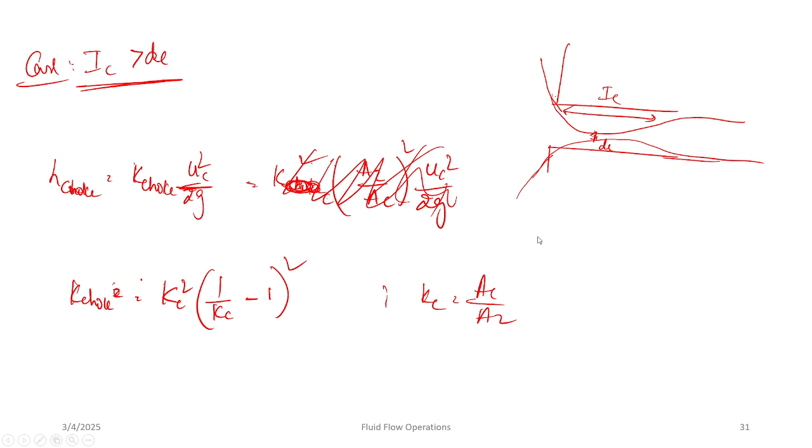So K choke is the choke contraction coefficient. And there's something called choke number as well, so the choke coefficient, K choke, is the choke contraction coefficient.

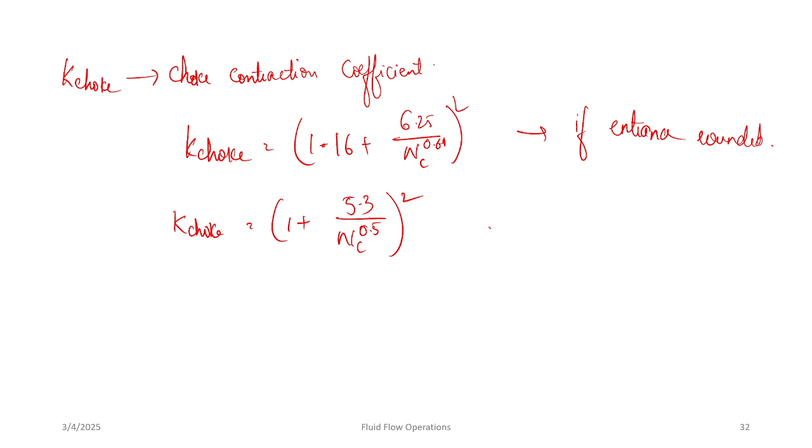This can be expressed by choke number as K choke equals 1.16 plus 6.25 by NC power 0.61, whole square, if the entrance is rounded. And if the entrance is not rounded, K choke will be 1 plus 5.3 by NC power 0.5, whole power 2.

So choke number NC is determined by Q by U bar into LC, where LC is the characteristic length and U bar is the mean flow velocity in the pipe.

So we have different conditions for Kc. Okay, let's look at them.

If this contraction is very sharp, if the edges are sharp, or if the entrance is very sharp, in that case Kc will be 0.5. And if this is a bit rounded or smooth, if this edge is rounded or the entrance is rounded, in that case Kc is 0.25.

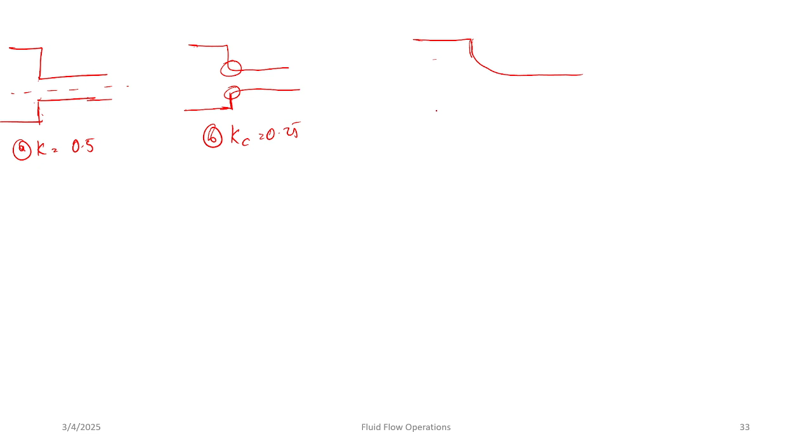And let's say if this is having a bend, something like this which is not sharp, this is a gradual change, then Kc can vary between 0.06 to 0.005. So depending upon these different conditions, we can have an angular channel, different conditions, and based on that the Kc value will be changing.

We also have losses when there is a change in direction of flow. This is basically a conceptual and more theoretical thing, like we have many predetermined values, so I won't be going through that. It was already discussed in the class by professors, but if you have any doubts you can ask me, I'll try to answer them.

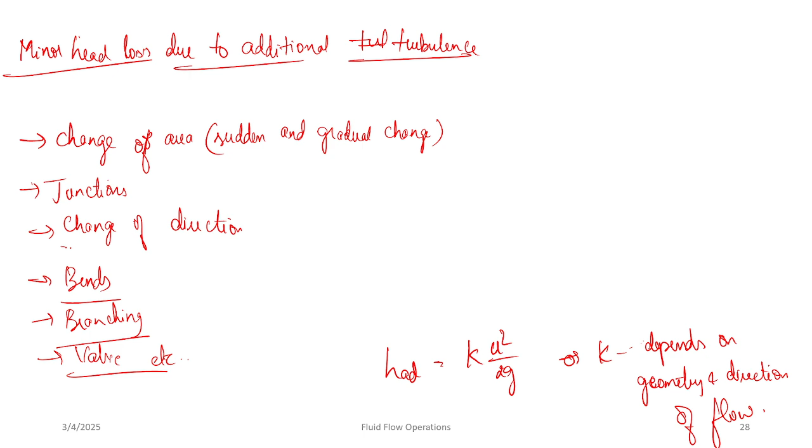Sir also discussed head loss in pipe branches. Whenever there's a pipe branch or a junction, there will be losses. Whenever there is branching, a valve, a bend, or a change of direction, we will be having head losses. Professor Majumdar sir has already discussed these things, so if you have any doubts I'll try to explain them.

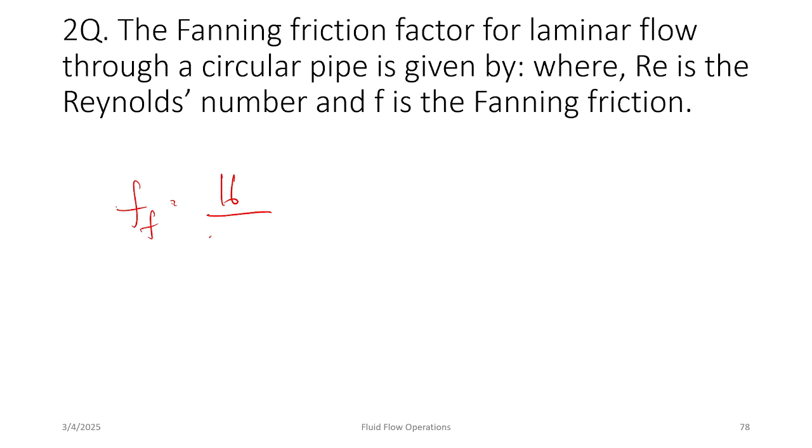Coming to second question: the fanning friction factor for laminar flow through a circular pipe is given by what formula? We already discussed this. For laminar flow through a circular pipe, FF will be 16 by rho u bar d by mu, which is equal to 16 by RE. And for Darcy friction factor, FD will be equal to 4 times FF, which is 4 into 16 by RE, equal to 64 by RE. So this is only for laminar flow through a circular pipe.

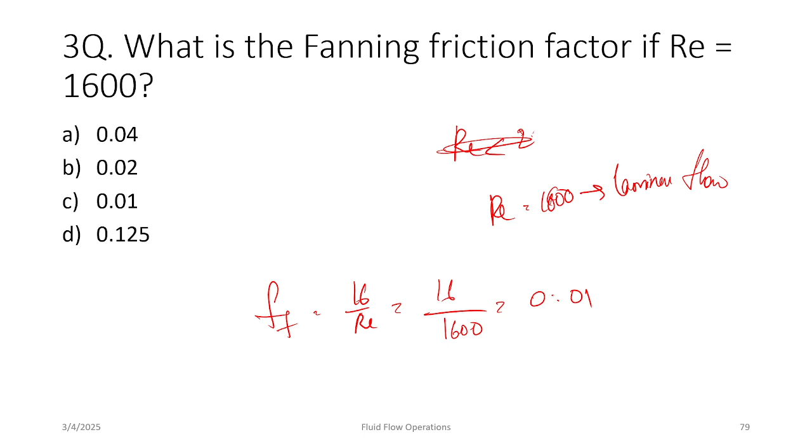Coming to third question: what is the fanning friction factor if RE is 1600? Since RE is less than 2300, this means it is laminar flow. In laminar flow, fanning friction factor equals 16 by RE. Substituting, 16 by 1600 equals 0.01, which is option C.